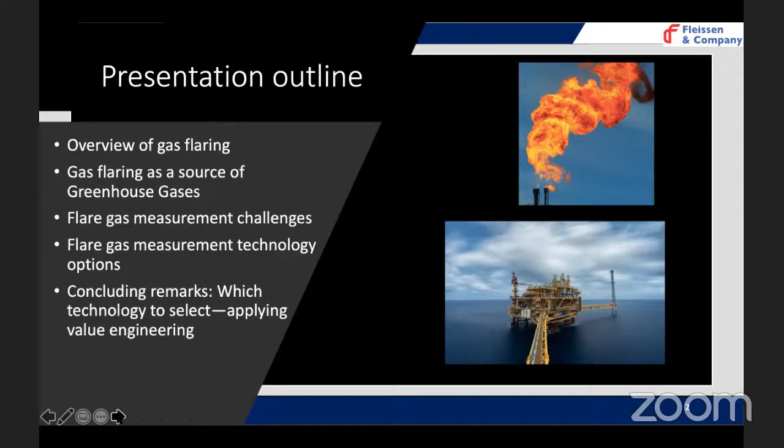So, let me start by giving an overview of gas flaring and why gas is flared. Gas flaring is basically a controlled combustion of natural gas through what is known as a flare stack, which is a combustion device that engineers in the field use in a controlled way to burn or get rid of gas that perhaps there is no economic use for, or there are no facilities to use it.

So gas flaring could be routine or intermittent. Routine flaring is when gas is being flared continuously because there is no equipment to economically transport or commercialize the gas. Intermittent flaring is usually for events like blow down when the system is overpressurized, or during well testing. But let's go into why gas is flared.

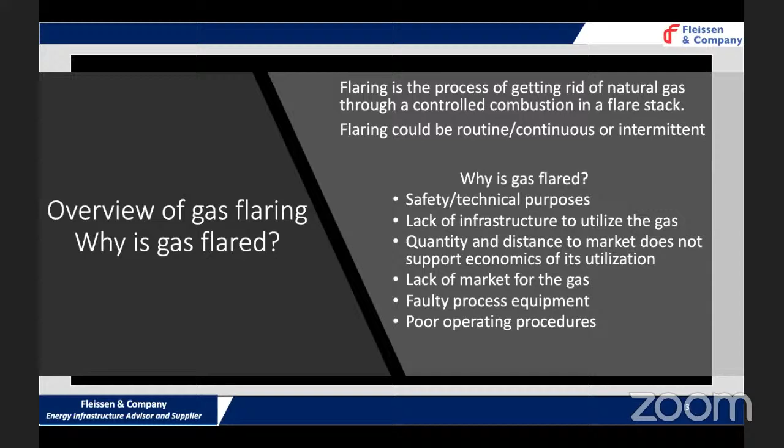Sometimes we flare because of faulty equipment, process upsets, and sometimes as a result of improper operating procedures not being followed.

As part of the overview of gas flaring, the next thing is, what are the sources of flaring? When we're doing well testing, the flaring could be coming from well testing - in that case, we have excess gas and we need to get rid of it as we test our wells. Crude oil production with associated gas is also very common.

You have gas conditioning plants where you produce natural gas liquid, and of course we have to flare there too, sometimes because of process upset, and sometimes because we intentionally need to do maintenance. Therefore, we have to plan and get rid of gaseous hydrocarbon to be able to carry out maintenance.

LNG production - for most people who have gone to places like Bonny, you can still see that even within LNG there is flaring. But that is not to say they are doing something bad; it's just part of the design of the plant that flaring has to go on, because instead of venting the gas into the atmosphere, we need to burn it so that we don't put methane directly into the atmosphere. Methane is 25 times worse than carbon dioxide in terms of global warming potential.

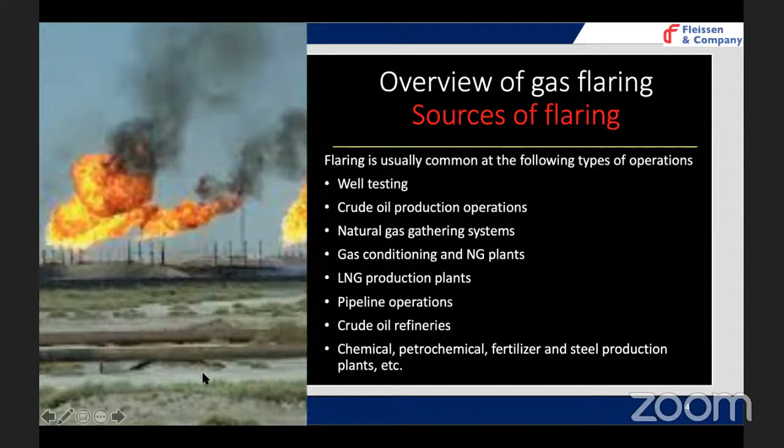Pipeline operation, and again crude oil refinery - in all these places, gas flaring is usually part of it. So the next thing is gas flaring as a source of greenhouse gas emissions.

So I'm sure someone is wondering what is a greenhouse gas. Greenhouse gases are those gases that have the ability of trapping heat in the atmosphere. Therefore, instead of the heat staying far away from the earth, we now get the effect of the heat.

Some of these greenhouse gases, typically, include carbon dioxide, methane, and nitrous oxide. Also you have things like fluorinated gases - basically some of the gases used in AC, they are also part of the greenhouse gases. They are even more potent, just that their release is in very small quantity. The largest greenhouse gas is carbon dioxide, but it's not as bad as methane, for example. But the quantity of carbon dioxide is much more in the atmosphere.

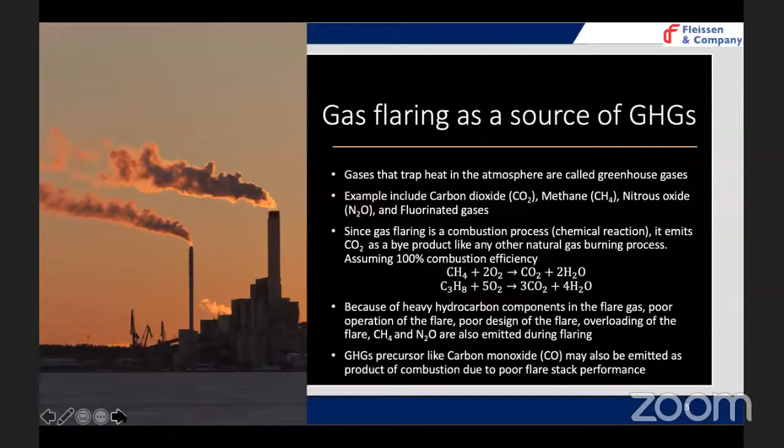Now, the next thing we can look at is international climate policy. These are some of the things that the oil industry has to start looking at more closely. Having worked on similar projects, I've seen that usually people in the environment department are the ones who understand what is going on with some of these policies.

One is the United Nations Framework Convention on Climate Change, of which Nigeria is a signatory. There is a requirement under UNFCCC that every country that is a member or party to the convention is required to produce, every 4 years, what is known as a national communication. This national communication is a statement of greenhouse gas inventory - how much greenhouse gas, for example, is Nigeria producing from all the sectors?

There is another organization under the United Nations called the Intergovernmental Panel on Climate Change. It's a scientific arm under the United Nations that develops knowledge for reporting greenhouse gas inventories. They have 4 classifications of sources of greenhouse gas emissions. So a country that is signatory to the United Nations Framework Convention on Climate Change has to produce a statement of inventory of all these sectors.

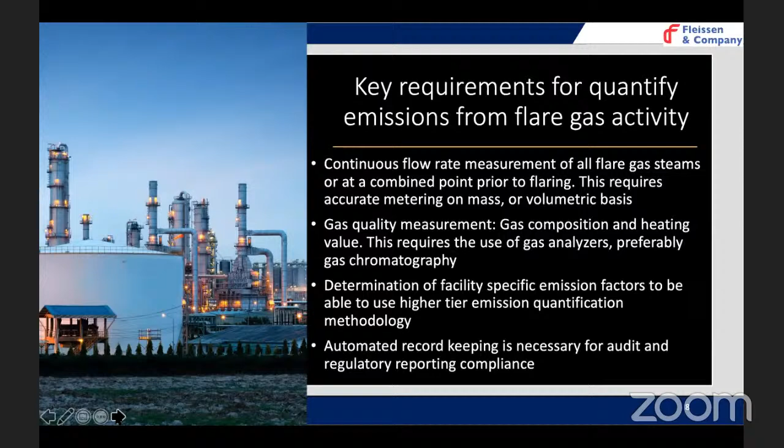Automating our record is one of the requirements. Oil companies are required to produce reports, almost on a daily basis, on what is flared. And if they have any event like a blowdown, they also have to report to DPR. That needs to be automated to minimize errors.

The next thing I want to show you now is this extract from BP. You can see that measurement is seriously highlighted, and it's key. In fact, it's the beginning, because that is where you need to get the data. You can learn from other very established companies operating in the oil and gas industry.

For example, BP is saying that they will install methane measurements at all existing major oil and gas processing sites and also publish this data. In Nigeria today, flare gas data is, if you want, a secret.

It shouldn't be at all. We have to be open with this. In most parts of the world, this is not a secret.

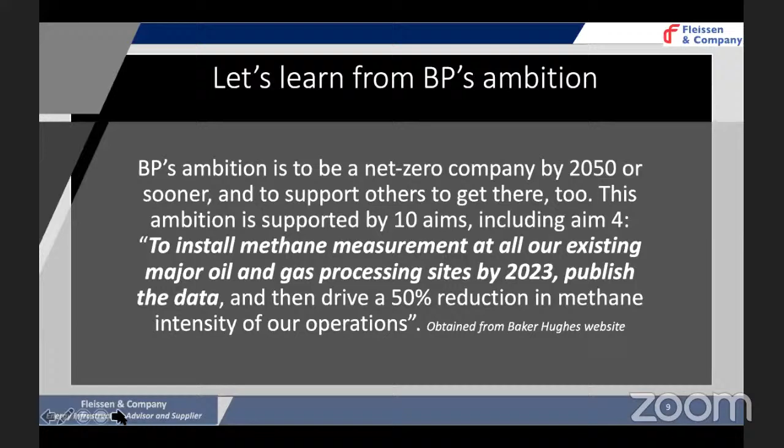So what's next? We have seen from all that I've presented so far, you can see the need for measurement. So the next question is, where should we place the flare gas measurement devices? Assuming we have flare gas and we want to put a flare gas meter in place, where should we place it?

Two options. One is what is called distributed metering. The flare gas is coming from various sources: gas from the production separator going to flare, gas from other equipment, even storage tanks, gas from the crude oil heater, gas from many other equipment within the system. If it's a gas processing plant, gas coming from the acid gas removal system, the dehydration system, the cryogenic heat exchanger, the demethanizer, the deethanizer, the depropanizer, the debutanizer. If you go to any of these plants, there is always a relief system linked back to the flare header. So we can put instrument measurement devices on all these lines to track what each piece of equipment is sending to the flare header.

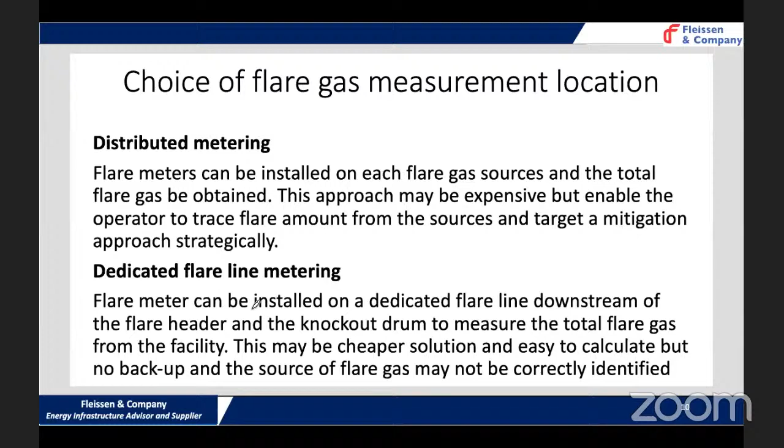So that's about allocating flare meters. The next thing is the challenges faced by flare measurement systems. One challenge is the wide range of flow rate.

In most cases, not all the gas goes to flare. Some companies take the gas for flaring within the plant, while others send it to a process system where it's utilized, leaving only a small volume to be flared. Sometimes the volume going to the flare is very high during blow down events or depressurization. Recently I went to a facility with a huge blow down going on, about 2 hours, with a huge amount of gas being flared. At that point, the flow rate is huge.

So those are the challenges the flare measurement system has to face: the need for the sensor to withstand high flow rate, the fact that flare lines are usually large pipeline sizes so you're measuring a large pipeline, and the high accuracy requirement. For example, DPR requires that flare gas meet an uncertainty requirement of plus or minus 5%.

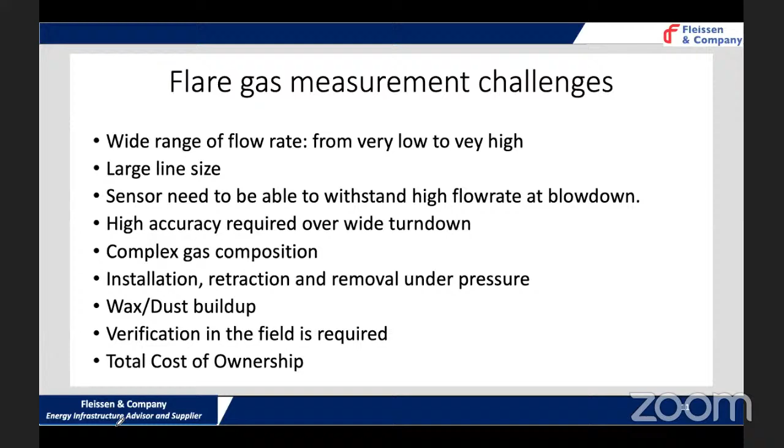Also, sometimes the gas composition is not very consistent, especially in refineries. There are installation issues, such as the requirement to install under operating conditions, since the system is operated without shutting down. Sometimes you have things like wax deposition on the sensor. The other challenge is the total cost of the meter.

So what are the options? There are several technologies that we could consider for measuring flare gas.

One is Coriolis - many people are familiar with the Coriolis meter. Orifice is what you find - in fact, for everywhere I've been in the oil and gas upstream sector, what I see is orifice. Very few ultrasonic. You have thermal mass flow meter, insertion vortex meter, insertion turbine meter, and average pitot flow meter.

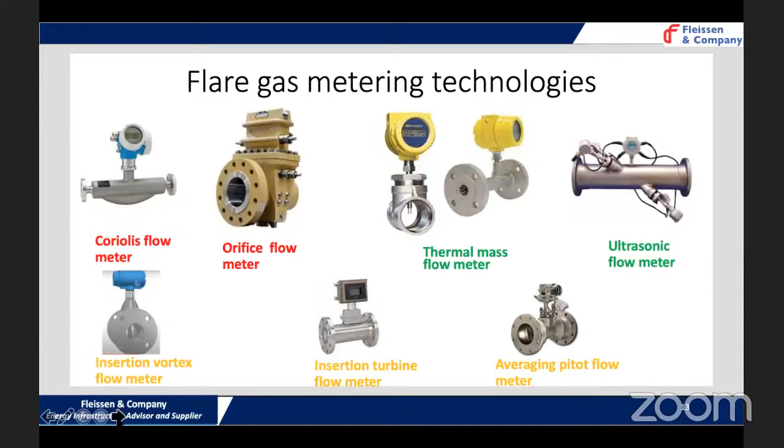I'm not going to go into detail on this, but what I want to highlight is that the ones shown in green seem to match the requirements stated before. They operate in a very wide operating range - at low flow rate of flare they can cope, and at very high flow rate they can cope as well. So I'm progressing with these two technologies, thermal mass and ultrasonic. The next step is looking at thermal mass and ultrasonic in detail.

I will now go into a little bit of detail. So what is ultrasonic? How does it measure? There are two types of ultrasonic flow meter. One is the clamp-on ultrasonic - basically the sensors are on the outside wall of the pipe. The other one is inline ultrasonic, where the sensor is installed into the pipe. It has to have small contact, staying on the wall of the pipe, so it does not get into the flow path.

So how does it measure? Basically, sound is sent through the stream of flow. There are two sensors, one on each end. It sends a signal - a sound signal goes from one sensor to the other. One is a listening sensor, the other is the emitting sensor. So it emits sound, the other listens to the sound and then sends the sound back.

The difference in the transit time of the sound movement within the medium is related to the average velocity of flow through the pipe. Just imagine swimming through a river - the time it takes you to go through the river depends on the flow of the river. If the river is flowing very fast, it might take you longer to get to the end. A similar principle is utilized here to efficiently measure what is passing through the flow stream.

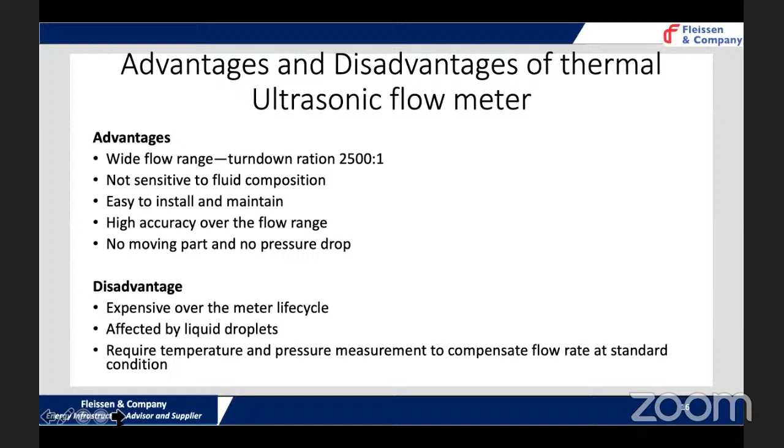It's affected by liquid drops. I remember doing experiments trying to use ultrasonic to measure gas flow with some droplets - it always gave a signal error. It requires temperature and pressure measurement to compensate for flow at standard conditions, and also to calculate the mass flow. The next technology is thermal mass.

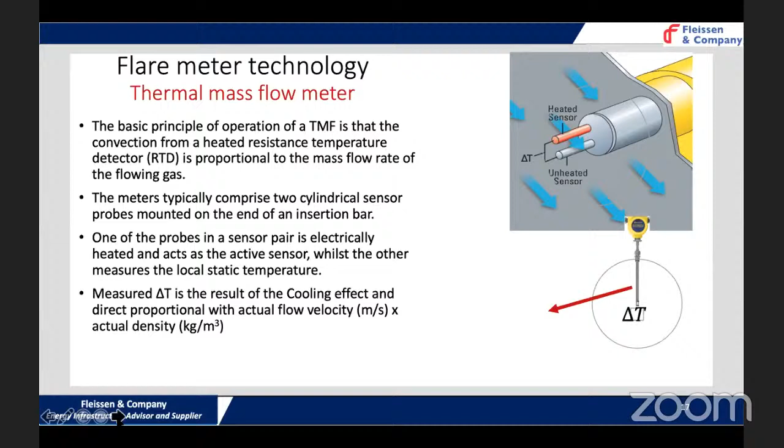Thermal mass is basically a very simple operation - it works based on the cooling effect. There are two sensors: one is a heating sensor, and the other is the cooling sensor. There are two ways to do this. One is continuously heating the sensor while keeping the temperature constant. Imagine you have a boiling ring that is continuously heated, and you pour cold water on it - the more cold water you pour, the more electricity is supplied to the element to make sure the heat does not reduce. The temperature difference between the cold side of the probe and the heated element is measured - one is a heated element, the other is a cold element.

The differential temperature across the element is kept constant, so the heating is increased so that once more flow is going through the sensor, the more the cooling, the faster the cooling. But then the more power being supplied to heat the element, that has a direct relationship with the density and velocity of the flow, the volumetric flow rate. So if you multiply the density by the velocity by the cross-sectional area of the flow path, you get the mass flow. So loosely speaking, that's how the meter operates.

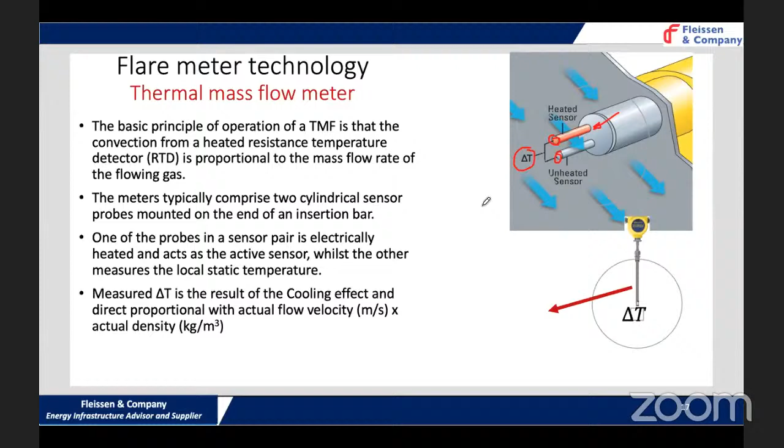What are the advantages? Again, it operates in a very wide flow range. It's probably one of the cheapest meters you see around, easy to install, high accuracy across the flow range, no moving parts, low pressure drop, basically no pressure drop. It does not require measurement of temperature because the sensor is already a temperature measurement device, so it does not require separate measurement. It measures the mass directly.

So the measurement from the thermal mass meter can be fed directly into an emission estimation or emission calculating model. The model could be in Excel or could be software. There are many software in the market, and the data from these meters can be fed straight into it.

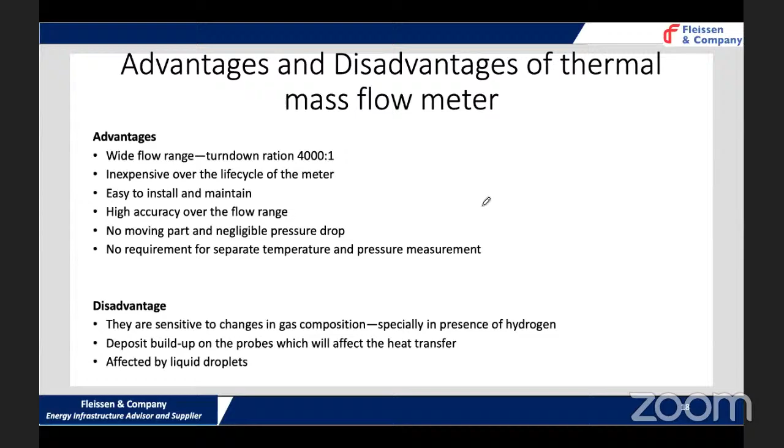Of course, there's no flow meter on the surface of the earth that is 100% accurate. There are always disadvantages because these are equipment. So it's sensitive to composition, especially because it depends on the cooling effect of the molecules. For example, if you have hydrogen in your gas, hydrogen has efficient heat capacity, therefore it takes heat faster compared to, say, methane. Also there could be things like wax build up on the probe, and it also has issues when there are liquid droplets. Manufacturers nowadays have devised ways of controlling all this.

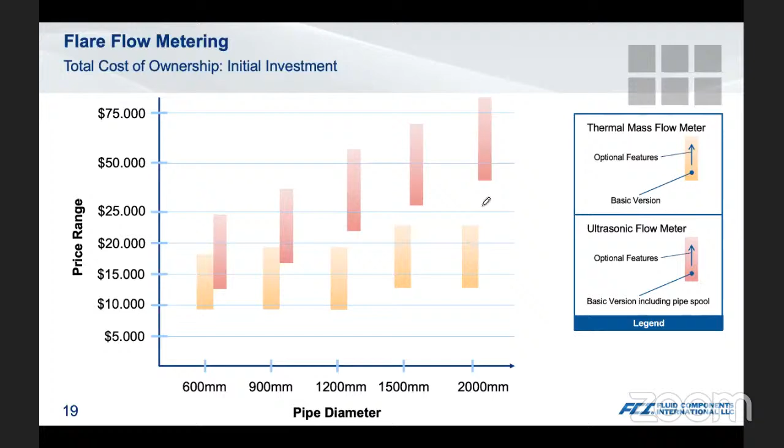So talking about cost, how does this cost comparison look, from Fluid Components International? From here you can see clearly that ultrasonic meters, everybody knows they are high-end meters. In fact, they are also the most used in the industry. They are well known, probably because most of the companies that make them are much bigger. So across all the diameters, from small to large, ultrasonic is more expensive, while the thermal mass meter is relatively cheaper.

Installation cost: 25,000 for ultrasonic, thermal mass is a very small amount. Commissioning, again very small for ultrasonic at 10,000, thermal mass 2,000. So in all, over a 5 year period, you'll be looking at ultrasonic spending something like $77,500, while thermal mass will be going for something like $21,500.

Thank you, Dr. Sunday, for a wonderful presentation on flare gas measurement for greenhouse gas emissions quantification, applying value engineering in technology selection. We've learned so much, from the meaning of flare gas to the United Nations' stance on flare gas emissions, to the fact that it's not just about the method being used to measure flare gas in Nigeria, where we are either overestimating or underestimating, but you showed us there are ways we can accurately measure the flare gas emitted in Nigeria by discussing some unique technologies.

One very interesting part of your presentation was that you did not just tell us the advantages or disadvantages of this equipment, but went further to tell us the economics, which is very key, so we can select the equipment or methods used to measure flare gas based on the size of the company, because marginal field operators and the IOCs can't use the same kind of meter. So based on the company's capacity, that determines which equipment they would proceed with. Thank you once again for a very nice and brilliant presentation.

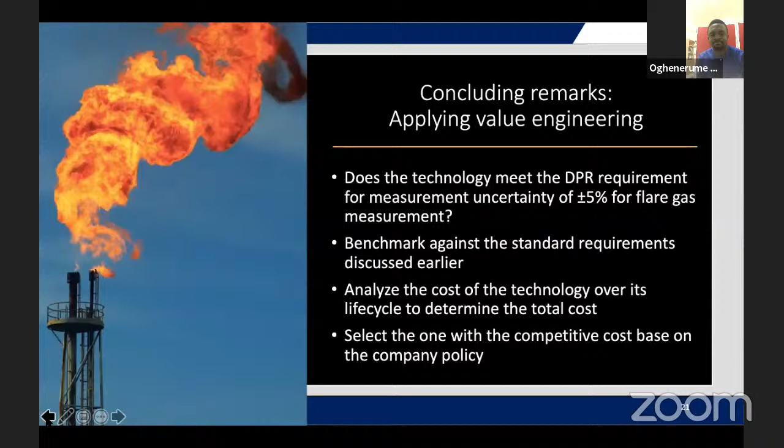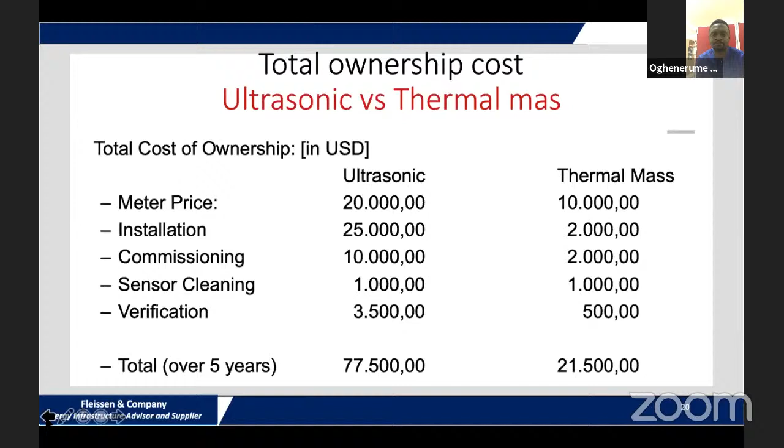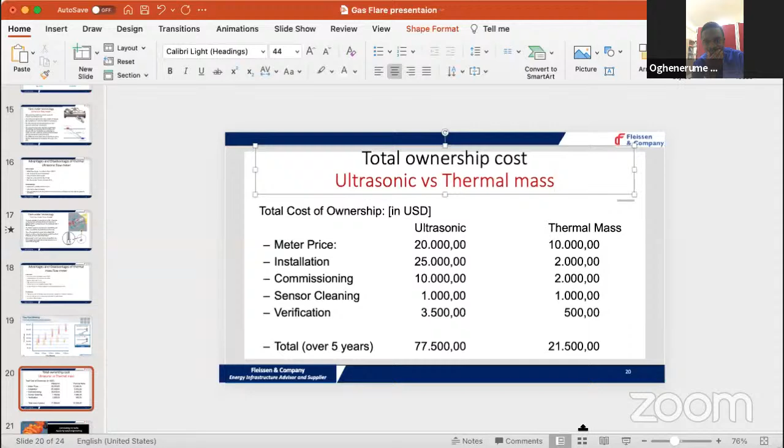That's a great question. So, small budget - you can see clearly I have this comparison here. Sorry, just give me one second. I think, just not to confuse people, I think an 'S' is missing here. So there's a comparison here - if you're going to go by budget, you know which one to go for.

As a marginal field operator going by budget, first you must meet the uncertainty requirement by the regulator, and then you think about your budget. So for a small budget person, I would say pick all the technical requirements, regulatory requirements, and go for the cheapest one.

Okay, thank you. If you need insight into how some of these costs work, you can contact me offline and I can give you more data in terms of cost - ballpark cost for all these meters.

Hello. Yes. I'm sorry, I don't know - I actually sent my question, but I discovered I sent it to the wrong place, I didn't send it public, so I don't know if I have your permission to ask since we're already rounding up. Just a quick one. Moderator: Yes, go on, please.

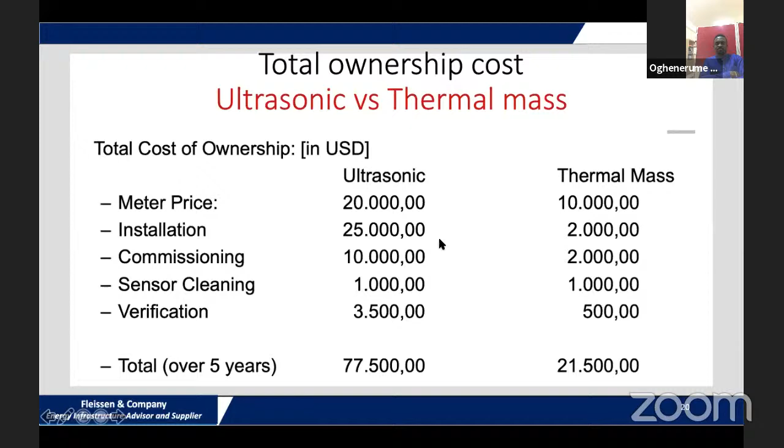I wanted to ask, because you talked about the problem we have in Nigeria with accurate data - who is responsible? Is it the DPR or the oil companies? And what is Nigeria's current situation in terms of data - is everything normal, the way we are doing it? Because there must be reasons why we are not having accurate data. So is the fault from the company, or is DPR not enforcing the laws?

Well, that's an interesting question. So, first I'll start from the DPR. Not speaking for DPR or anything, but what I do, perhaps as a consultant, is to look at the documents that are available. I don't go asking companies in terms of compliance or enforcement.

So if I'm going to talk about what the DPR has done, especially in the past 3 years - the Flare Gas Prevention of Waste and Pollution Regulation of 2018 - of course in the last 3 years, was to address some of this confusion, and that was again DPR's work. The guidelines for quantifying quantity and quality measurement guidelines, which has gone through several editions. The latest edition covered is the one that has this uncertainty requirement for flare gas measurements.

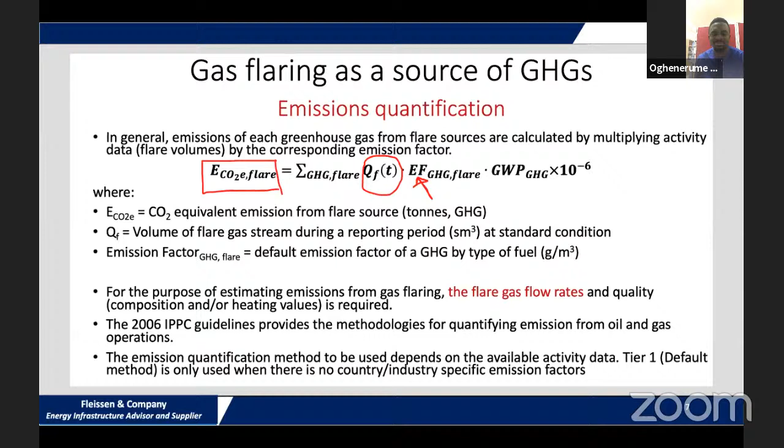Sorry, I just stepped out a bit and I heard my name as I came back in. Do you want to bring me up to speed on what you want me to speak on exactly, so that I could do justice to it? Thank you. Moderator, over to you. Can you hear me? Yes, I can now. I heard my name and you wanted me to speak to something - what is it exactly?

A question was asked in respect to the regulation of gas flaring in Nigeria - what has DPR been doing, and have companies been complying with it? Because the speaker also mentioned that we're either overestimating or underestimating the amount of gas that is being flared. So we want to know, has there been compliance from the companies, and what has DPR been doing in respect to the regulation of flared gas?

Thank you very much for the recap. So basically it's twofold action so far. As you're already aware, there are several regulations and statutory provisions that prohibit gas flaring, but we all understand in our industry that when a lot of these facilities were designed and became operational, they did not put capacity to manage the associated gas that comes with the oil produced.

So flaring goes on. But over time, we have released several regulations to make sure that companies who flare have to retrofit and redesign, as it were, to manage the flares. Of course, there are fines and penalties for flared gas. We also have the gas network code, as you're already aware, on programs where all the gases that hitherto have been flared are utilized domestically to produce LPG.

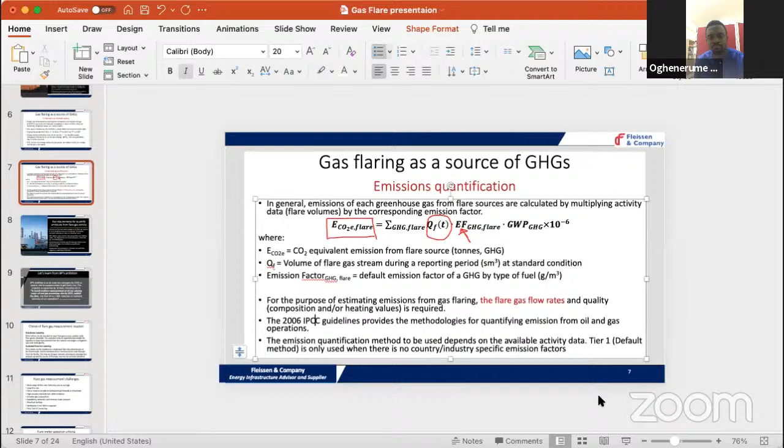So remember when I said twofold. So the idea is not just to stop flaring, it's of course to reduce contribution to greenhouse gases.

In terms of compliance, yes, there has been a very much increased level of compliance from the industry. Currently we've started what we call methane management from the environment side, which has to do with leak detection and repair programs across the oil and gas value chain. Of course, we're starting on the upstream first. A guideline has been developed already and is undergoing internal reviews. All companies have been required to look at all the equipment that they have and calculate their methane release potentials.

So there's a lot of data gathering ongoing. Guidelines have been drafted. The push is to ensure proper measurement, because if you don't measure, then you will not know what you're emitting into the environment. And that way, you can now begin to put in place leak detection and repair mechanisms for all those assets that show indications of release into the environment.

So yes, in a nutshell, compliance has increased over time. There's a lot to do, and we're still doing that as well. Once the guidelines are released, there will be a strategy to manage and monitor as well. Fines and penalties, even though they are the last resort, we still rely on them. But overall, there has been an increase in compliance in monitoring and managing greenhouse gas in the oil and gas industry currently, as compared to where we're coming from.

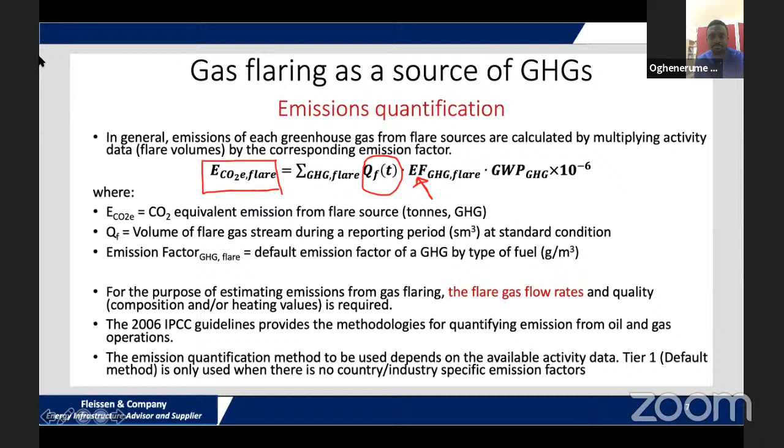What we're looking at is to ensure that, maybe not net zero in the nearest future, but of course it's very possible, we're also working together with the Federal Ministry of Environment on looking at our nationally determined contributions for greenhouse gases and all those climate change issues, short-lived climate pollutants, anything across the oil and gas value chain that contributes to greenhouse gas. The DPR is seriously on it, we're on top of it. We're working closely with our partners as well, and I would say the industry so far has been very cooperative. Thank you.